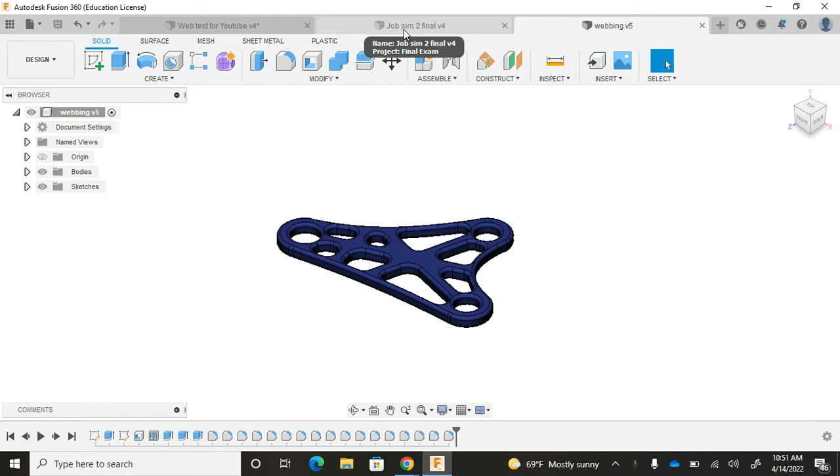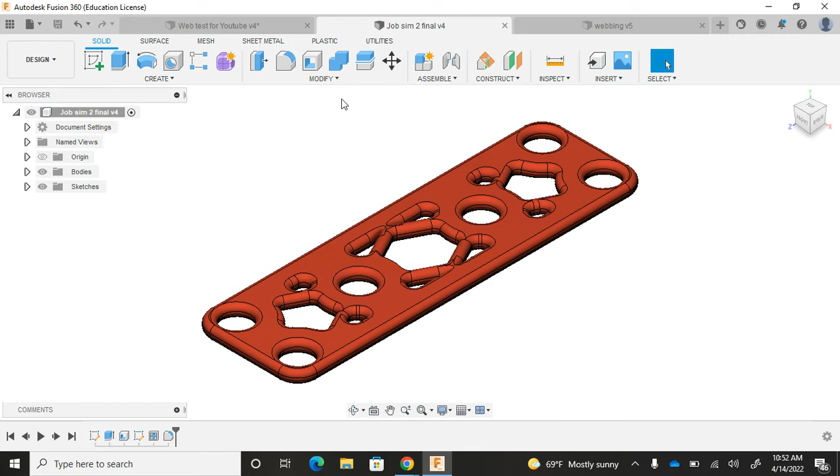And here's a totally different rectangular example where you can clearly see that load goes to 6 different circular holes, four on the ends and two in the middle for a total of 6. So it's important to recognize where you're going to be receiving load and base your calculations off of that.

So I set up a little geometry lesson here to explain the 30-60-90 triangle, which historically has been used in steel trusses and any type of structural joist. Now your 30-degree angles are ideal for the load point.

So if I'm going to attach something with a screw or a bolt, for example, and I have a hole drilled out through my material for that, that is considered a load point. The opposite wall needs to have the 60 or the 90-degree angle. Okay, those are set up in this demonstration that I'm showing you, as you will see.

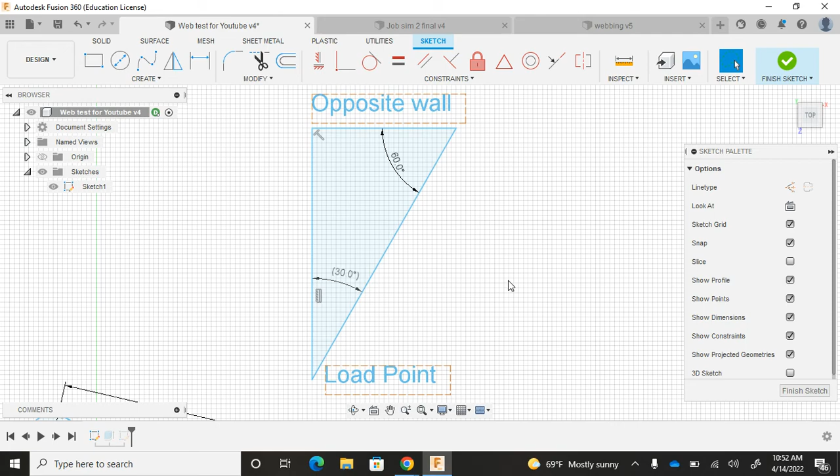So we're going to pan down and look at our actual working geometry. And once I have my constraints, I can go ahead and finish that sketch and extrude it. Now I also have a sketch on top of this particular body, which I am going to turn into webbing later, and it will update actively.

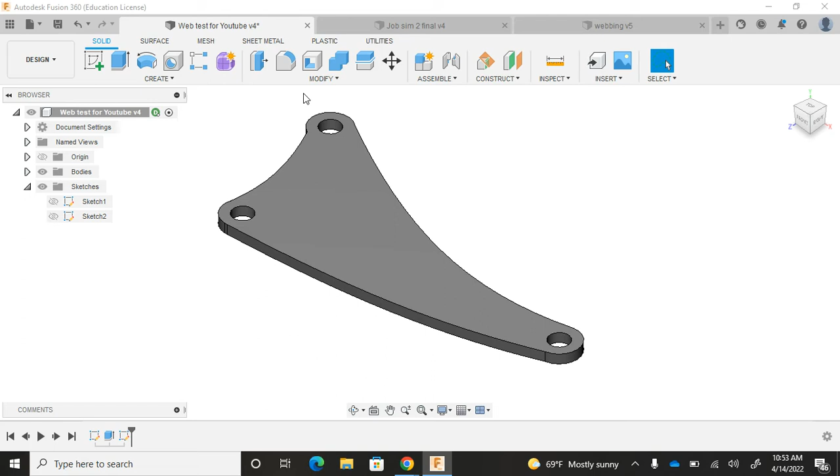But first, let's turn that top sketch off temporarily and apply a shell. I want to shell off of the top surface and the bottom surface so that I cut clean through the material, and I'll use a 2.5 millimeter dimension for that.

At that point in time, I can go back up to my home view, turn that sketch back on, and if I am sort of confident about these rib locations that I've just drawn lines and sketch, I could go ahead with the webbing and then adjust them later.

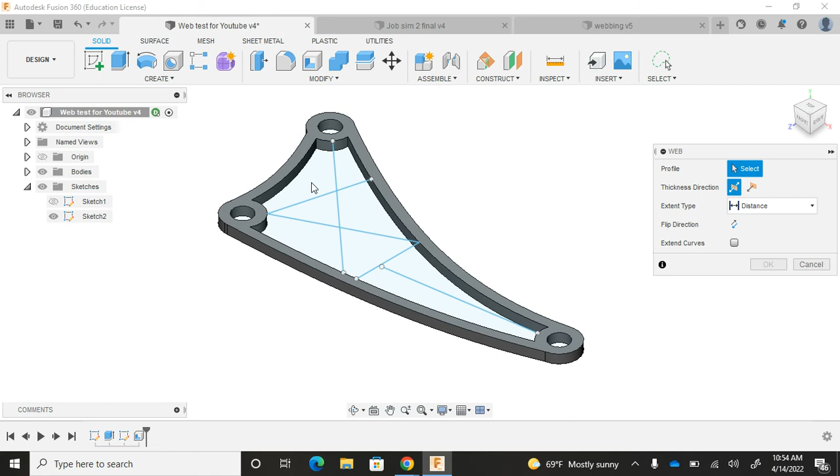So let's try that. We're going to create a web, and we want to use each of these lines that we have drawn in the sketch mode, and we want to apply the 2.5 millimeter. We could decide that we want to, in this case, extend the curves, which will beef it up even a little bit more, and that might be helpful.

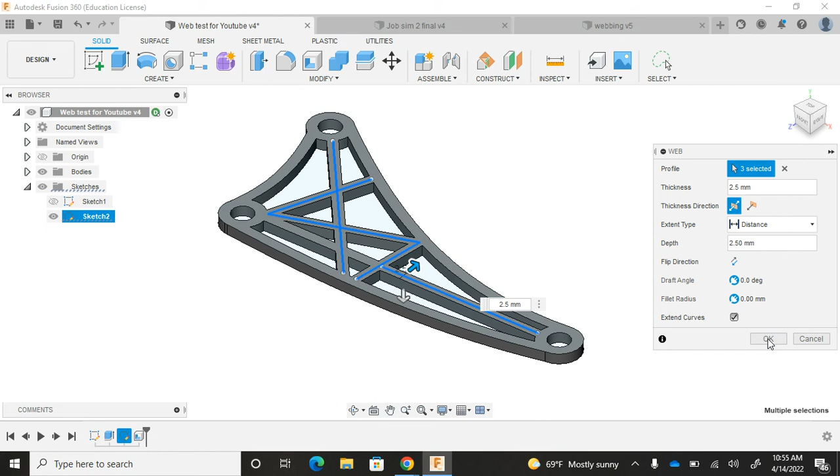Now my options are for thickness and for depth because I'm going with a distance. I could just say that I wanted to go to the next intersection. In this case, that's going to produce undesirable results. So I want to use distance and clearly define where I want each of those ribs of my web. So once I say OK to that, that'll be locked in.